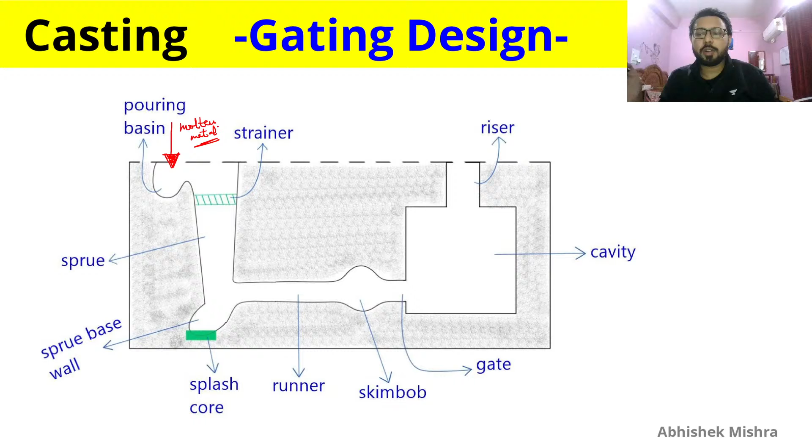The runner is a horizontal passage, not vertical, for the metal to pass through. The skimbob is the section where both light and heavy impurities get removed from the molten metal, so it can pass through the in-gate and enter the primary cavity. The riser, as discussed before, is there to compensate the shrinkages, specifically liquid and solidification shrinkage, that is till phase change. All shrinkages will be compensated by the riser, and after this, by solid shrinkage allowance.

So for the pouring basin, here are the standards: 2.5D, 25R, D, where D is the topmost sprue diameter. A good design of pouring basin is one which reduces the velocity of liquid metal in the sprue to minimize erosion. The main job of the pouring basin is to make the liquid metal enter the sprue such that erosion is minimized. These standards are obtained via experimentation. D is the diameter of the topmost part of the sprue, the height of the pouring basin is 2.5D, and the small curvature is 25R in radius.

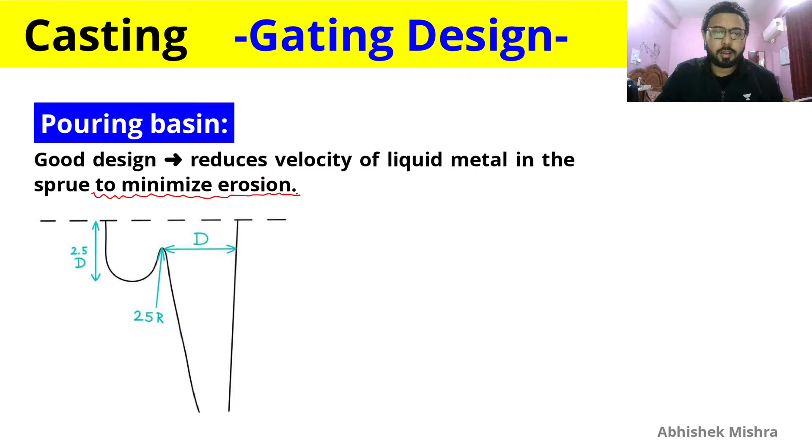Now we will move forward. I hope you can understand this, and you can write 2.5D, 25R and D. For pouring basin, you should write that its purpose is to minimize erosion - this will be enough, along with drawing this figure. That will be enough for your revision.

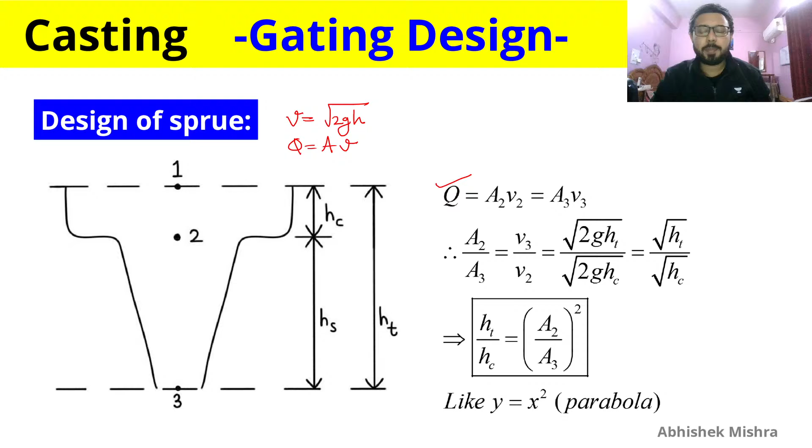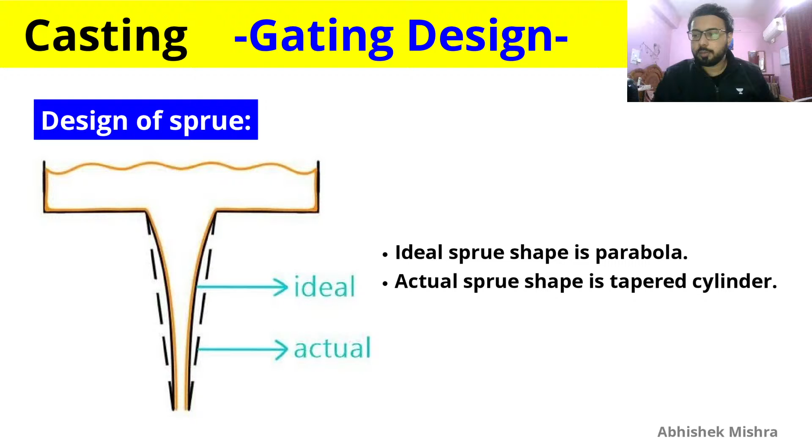So we have this ideal sprue shape, which is a parabola, shown here as a parabolic curve, and the actual shape is a tapered cylinder. Why actual instead of ideal? Because, as I said, manufacturing difficulty leads to using the tapered form instead. That should be clear now.

What is air aspiration? It is the sucking of air into the low pressure area, and that air gets absorbed into the molten metal, which then leads to a porous casting, which is obviously not desired.

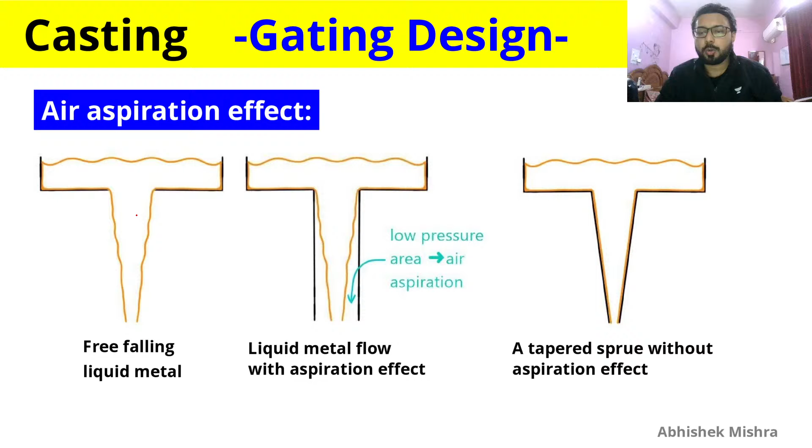So liquid metal flow with the air aspiration effect occurs when the sprue is straight instead of tapered or parabolic. If you provide a tapered sprue, you will not get the air aspiration effect.

Air aspiration effect: the entering of gases, from the baking of organic compounds present in the mold, into the liquid metal stream. These generated gases get entered into the liquid metal stream, making the casting porous and hence weak.

As I mentioned, pressure anywhere in the liquid stream should not be negative, because a negative pressure creates a low pressure area that sucks in air, leading to absorption or mixing of air with the liquid metal stream, which is not desired. So again, remember the ideal shape and actual shape, which help avoid air aspiration.

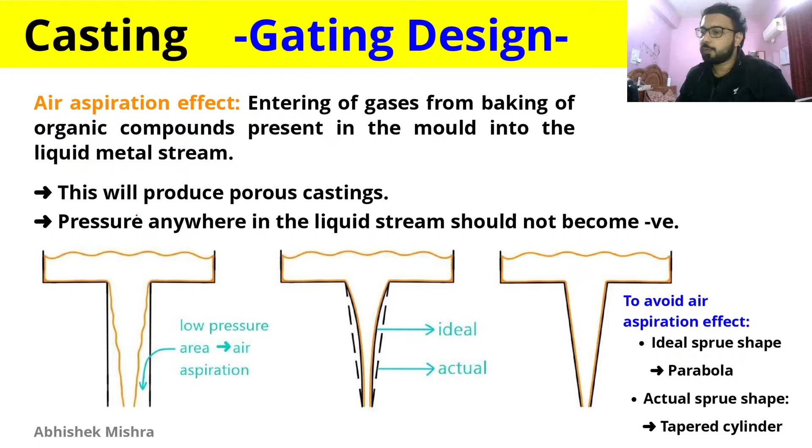Now let's talk about the runner quickly. To minimize turbulent losses, even though it gives more surface area, the section usually taken is a tapered cross section. So a tapered cross section runner is mainly used for minimizing turbulent losses.

But since it has more surface area, and more surface area means more heat transfer, because more area is in contact with the liquid metal to lose heat, there will be a lot of heat losses in this tapered, or trapezoidal, cross section runner.

But for a circular or cylindrical cross section runner, we can minimize heat losses because it has less surface area, though turbulent losses will be present. So you have to choose the runner cross section according to your requirement: if you need less turbulent losses, go with trapezoidal, and if you need less heat transfer losses, go with a circular or cylindrical cross section.

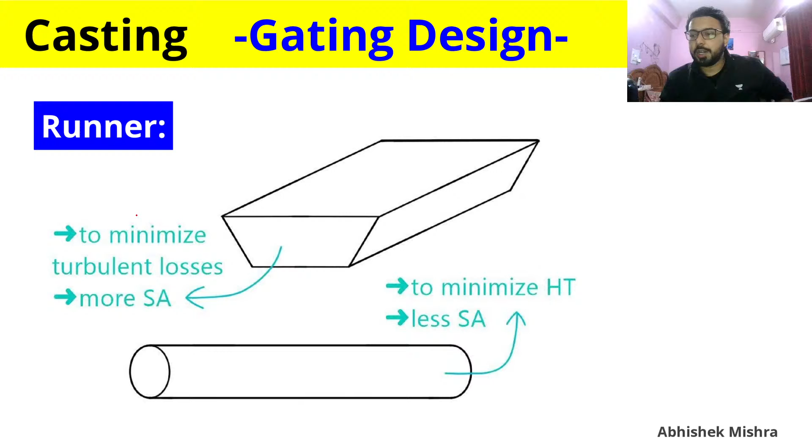Gate or in-gate is the final cross section or final section after which your molten metal enters the mold cavity, the primary cavity. So the actual entry point through which the liquid metal enters the mold cavity is the gate or in-gate. If a question asks what is the actual entry point after which molten metal enters the cavity, the answer should be in-gate or gate.

Both terms are the same. Gating design can be classified into two or three types: top, bottom, or parting line gating design. Let's study about them now.

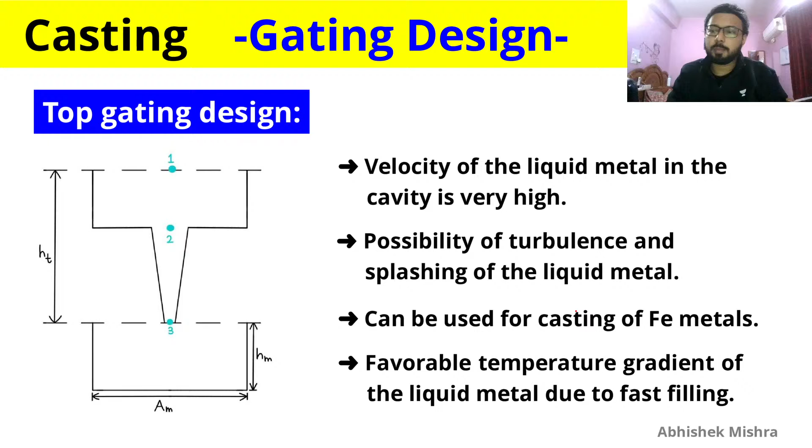So top gating system can be used for ferrous metal, even though it is having turbulence and splashing, because of favorable temperature gradient of the metal due to fast filling. The velocity will be very high and the temperature gradient will be in a favorable direction due to this fast filling. So these are some benefits, and just remember this formula of filling time. You should note this down, because we will be doing a lot of questions in which this formula is coming, and in a lot of GATE examinations also.

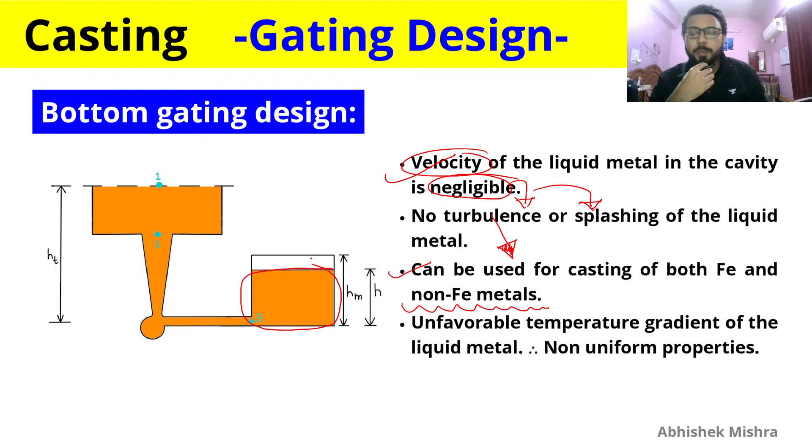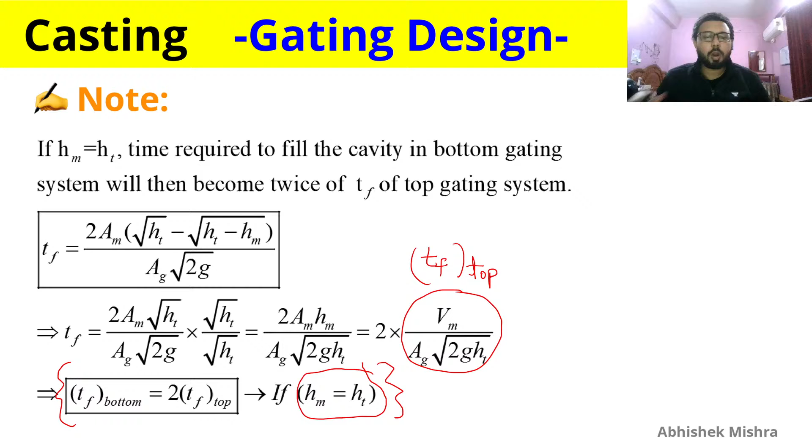So in this whole slide, you only have to remember this bottom part. Don't remember the whole process of how this is happening. Just remember this bottom part, that TF bottom is equal to 2 times TF top if HM is equal to HT. And again, this formula is very important here too.

Don't forget to just write the 2 here, because in the question it is possible that you can forget this. And again, the formula is quite simple. HT is coming first in both the times, and HM is here in minus, and both are under roots. And here there is no HT. Also remember this, because in the filling time of top gating system we found that there is HT here, but in the bottom gating system there is only 2 under root 2G. So remember these little things, and let's move forward.

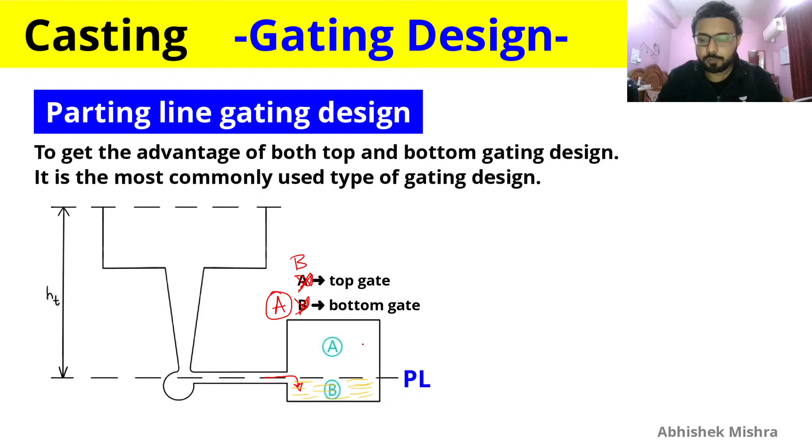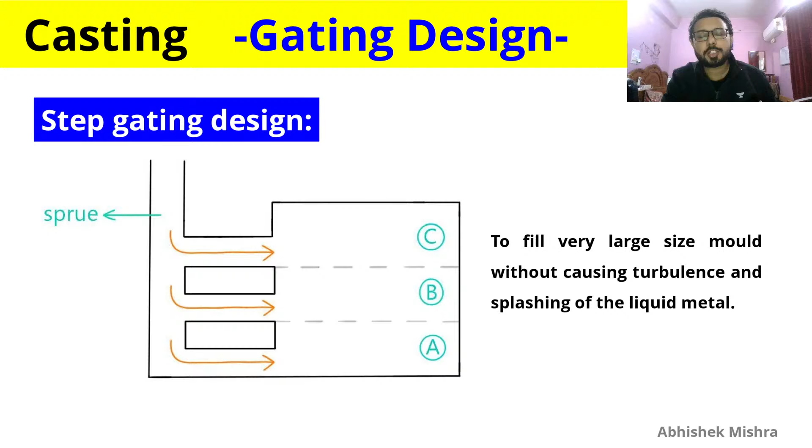Here the gate is divided into steps, and the molten metal enters by passing through these individual passages. You can just remember that this is done to avoid the turbulence and splashing. That's it.

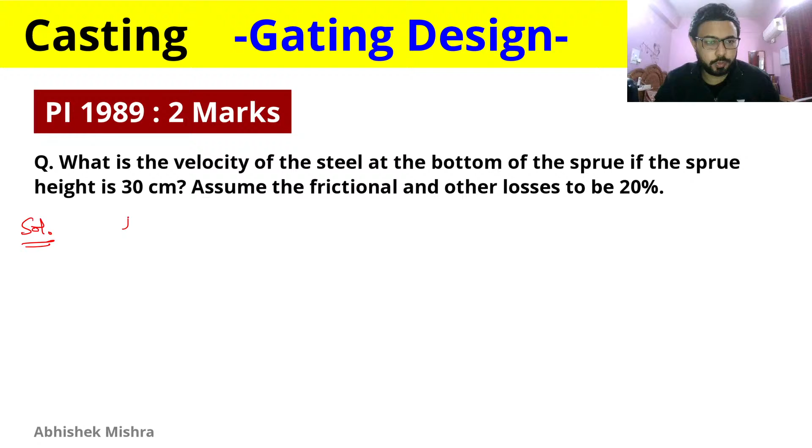What is the velocity of the steel at the bottom of the sprue if the sprue height is 30 centimeters, and we have to assume the frictional and other losses to be 20%? This question is quite interesting because we have frictional losses to account for, 20%.

There is one thing here which might confuse you in your GATE examination, so it's better you understand this very clearly. The velocity at the bottom of the sprue will be, first of all, you can simply give this answer by under root 2gh, and the height of sprue here is given as 30 centimeters, so HS is 30 centimeters. But here some losses are occurring, which will obviously make this velocity less.

So what you have to do is find out: will you find the answer by doing this, or will you get the correct answer by doing this? So what is the correct approach to this question? Benny, if you are watching this session live, can you tell me what is the correct approach to this question, the first one or the second one?

The 0.8, which is the factor that accounts for 20% losses due to friction, should we multiply 0.8 outside the under root 2gh, or inside the under root 2gh? I will answer this question in 15 to 20 seconds. This doubt can arise about where this 0.8 should be to get the final answer.

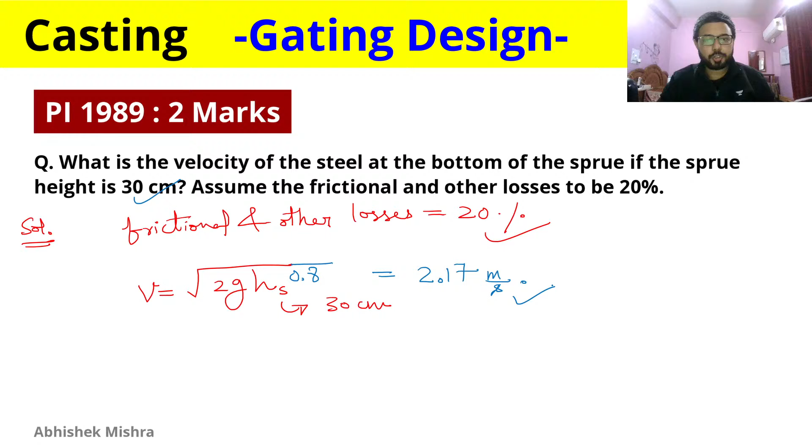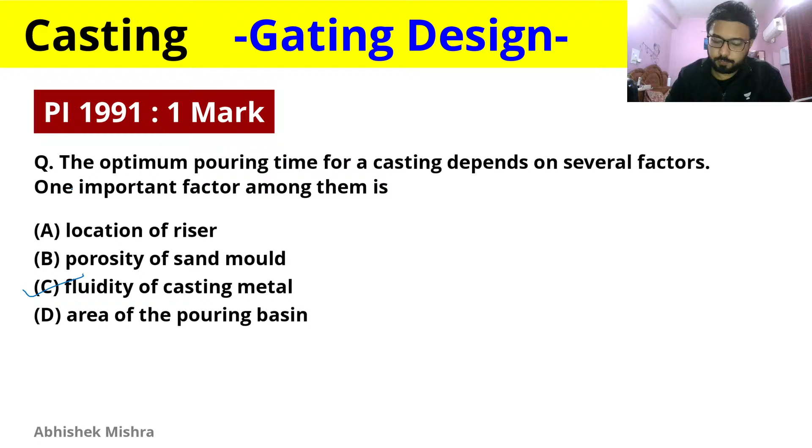So we have another question here. I will not be doing this question fully. I will just be telling you the steps and the concept that we can learn from this question, because this is again a revision class.

So we are just doing a quick revision. The whole session will be focused on you learning the concepts, tips and tricks, and the important things that should be taken care of. And here is the first thing you should remember, which can come in handy in other subjects too.

Acceleration due to gravity is sometimes given as 10. If it is given as 10, always try to take it as 10, because otherwise you will get the wrong answer. More specifically, for fill-in-the-blank answers, you should totally take this value as 10. So always check if the data given is what you're actually using. And if it is not given as 10, then always take 9.81.

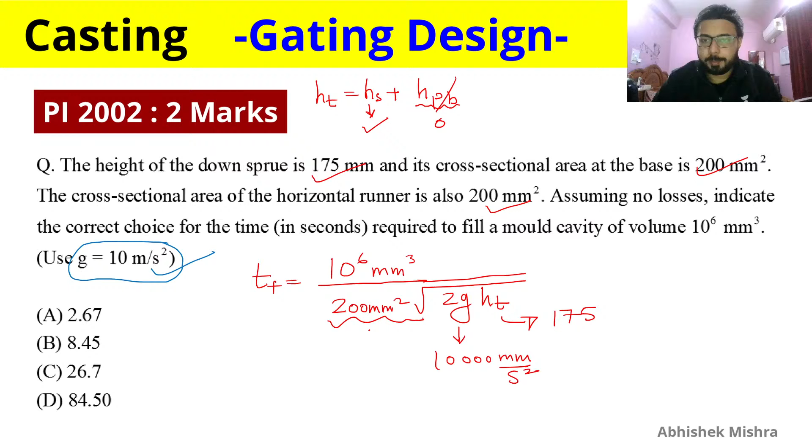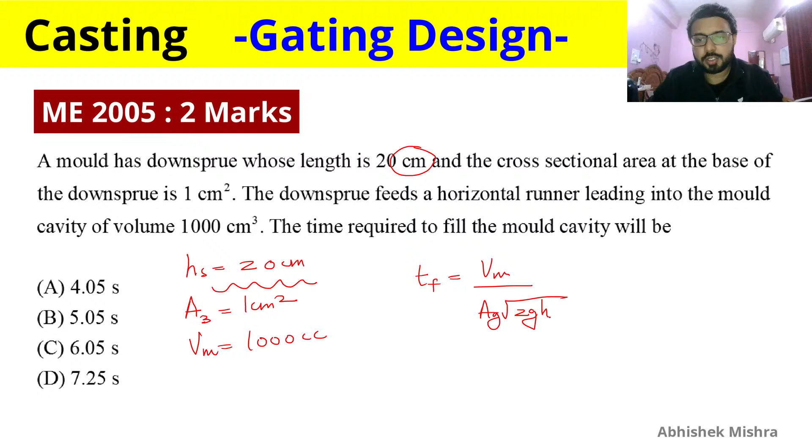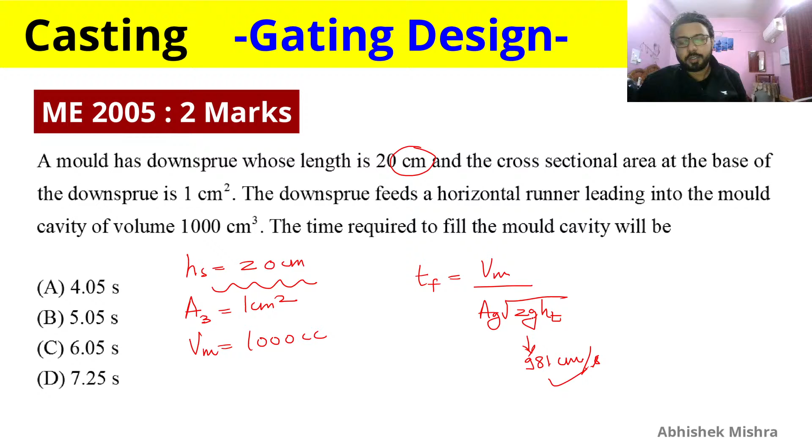Down sprue feeds a horizontal runner leading into mold cavity of volume. So volume of mold cavity is given. Time required to fill is given, which will be calculated using Vm by Ag times under root 2GHT. Since HT cannot be calculated, we will just continue by putting HS there, and here also we can find the correct answer. But remember, if you are putting everything in centimeter, put this G also in centimeter, which will be this. So instead of converting the whole thing, convert the G only and keep the whole calculation in centimeters itself.

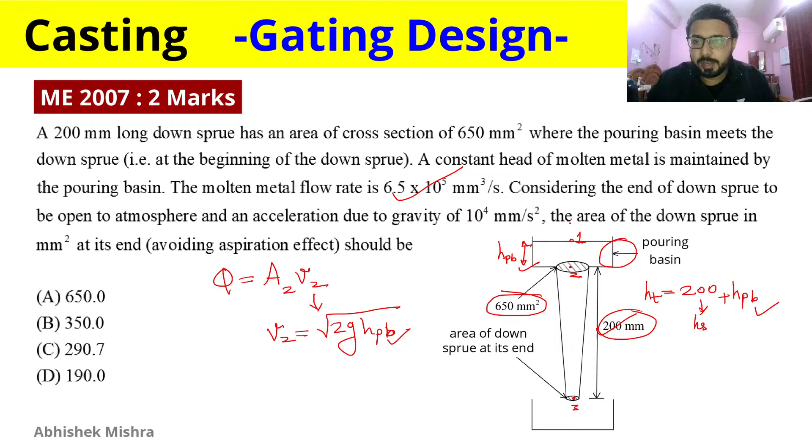And let's see if we have this Q or not. This Q is here in mm cube per second, so we can totally calculate all these things. After we have calculated all these things, what we have to calculate in the question is the area of the down sprue. So after we have calculated HT, we can find V3 by using this formula, and then we can use this volumetric flow rate equation. We have this V3, we have this Q, then we can find the answer, that is A3, which will be our answer.

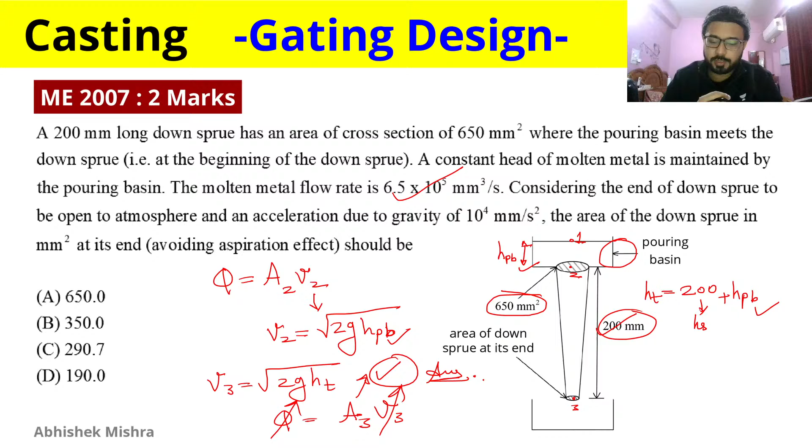So this whole thing can be done in this manner. The steps are to be followed, and I hope this is clear. Now we should be moving forward. But here don't just take the pouring basin, don't ignore the pouring basin height and take only the sprue height. If you do that, you will not get the correct answer. So while calculating area at 3, take the height above it. Above it you will be getting the height of sprue and height of pouring basin both. That will give you the total height there.

So this was the figure in which I solved the question when I just completed this in my regular class. But since this is revision, we discussed it here only.

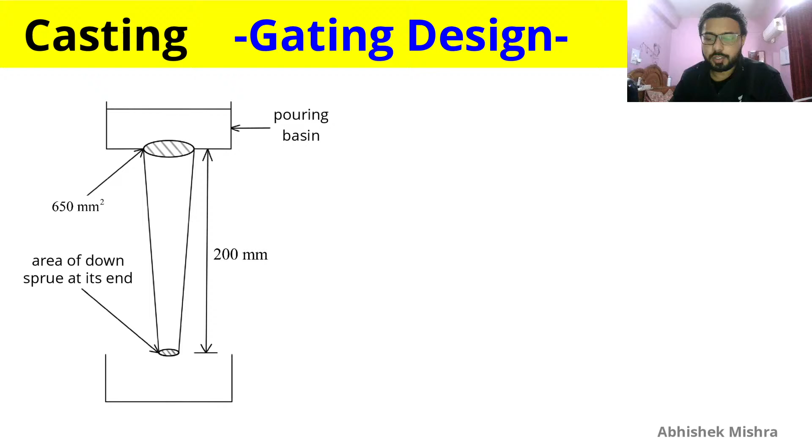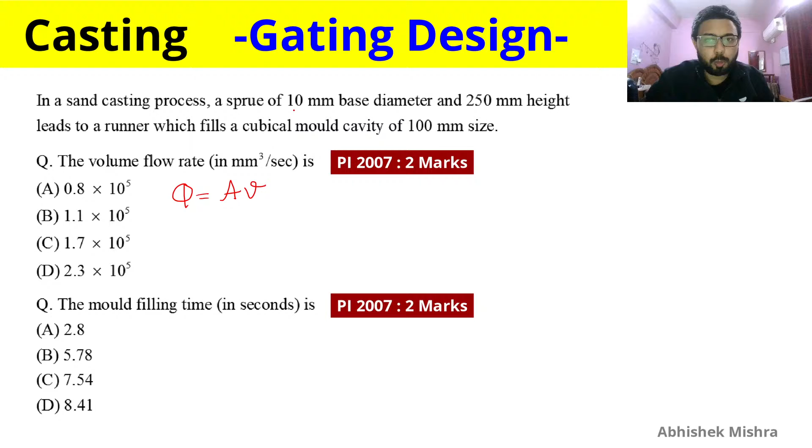So we have a next question which is asking us for volumetric flow rate, that is Q. And here to calculate Q we need an area and we need a velocity. Let's see, we have this sprue base diameter and height. So sprue base diameter will provide us this area. Base is the bottom part, so bottom part we will have this height 250 of sprue.

And we have the cubical mold cavity, so that volume can also be calculated. So what we can do here, we can find the velocity by using this formula under root 2g ht, since there is no option of calculating pouring basin height. So we will go with the sprue height only to calculate this velocity at the base of the sprue. So final volume flow rate can be obtained like that.

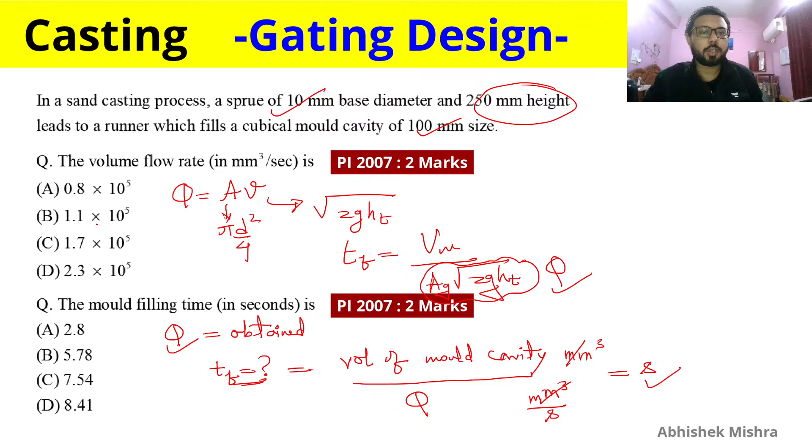So this is another way of doing calculation of filling time. You can also do the calculation by using this formula of filling time, that is TF is equal to VM divided by AG under root 2G HT, and you will find that this bottom part is nothing but Q. So since you have obtained the volumetric flow rate itself here, I think it should be 1.7, I don't remember the exact answer, but if you have obtained a final value of Q, then you should totally use that and just avoid this calculation here.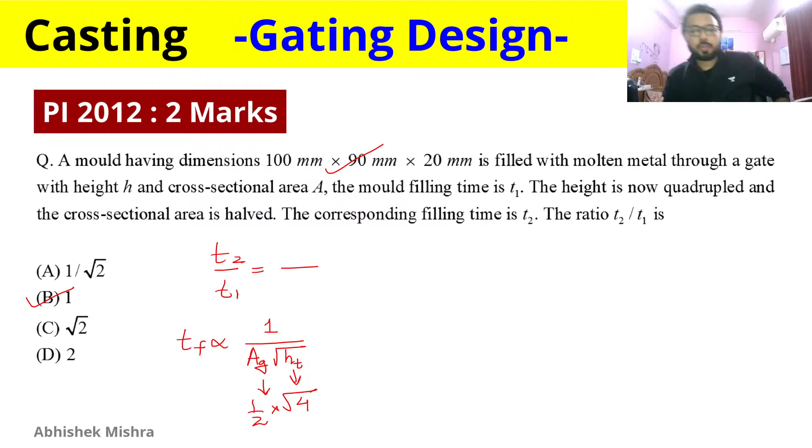And here is one more question which is taking into account the parting line gate. So that gate system will be like this, where you can see that our mold cavity is divided into 2 parts, A and B. So this A part will be treated as the bottom gate system, and this B part will be treated as the top gate system.

So what will happen, you need to just calculate the filling time, or the filling time is given as 10 seconds. So you need to calculate the AG by putting the equations of filling time of this top and bottom gate respectively. By doing this you can obtain the area of gate and the filling time of bottom gate and top gate. I have already shown you the formulas for what they are.

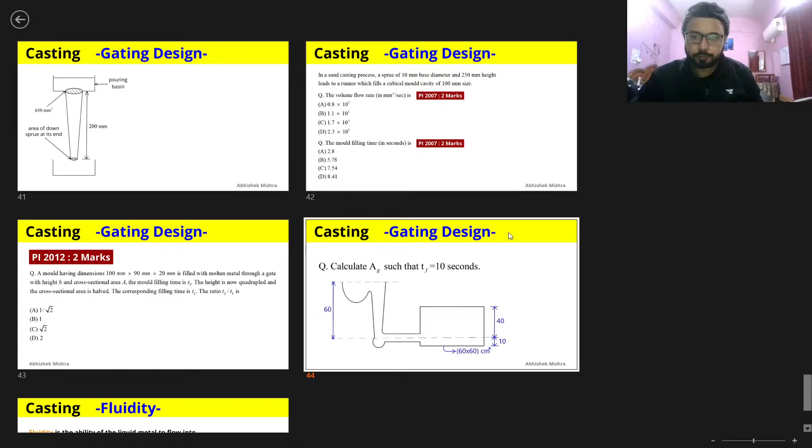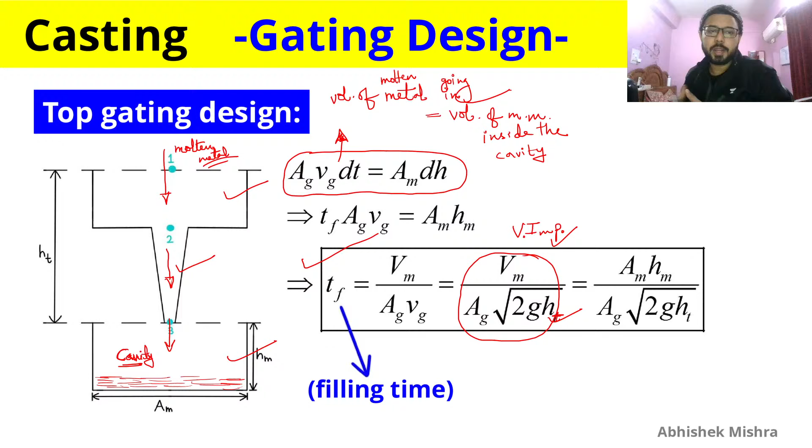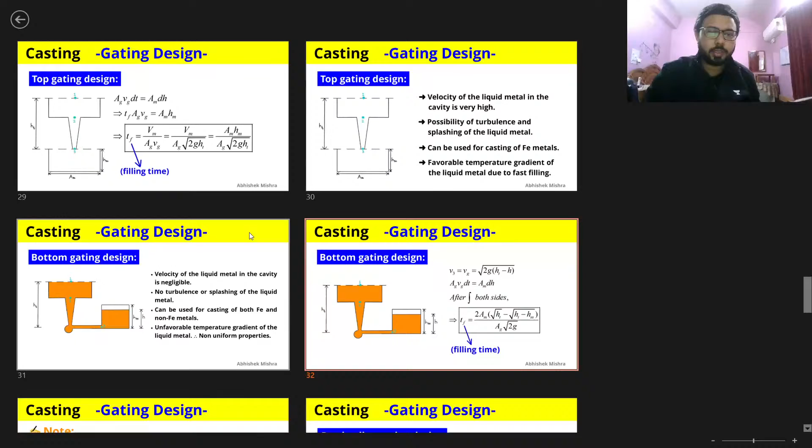Let me show you that again. So for the top gate we had this filling time formula, you can use that, and there the volume of mold will be changed. Only that volume which is having the top gating filling done by the top gating design will be there in this formula, and for bottom gating we will take that volume only where the bottom gating design is being followed. So that will be the process of doing the question here, and you can obtain that answer properly.

So let's move forward. I don't think this can be asked, but if the calculation is easy then it could be asked in the GATE examination. But this question is quite lengthy because you have to do calculation two times using these two formulas. So this is a bit lengthy here, but the concept is very good. The concept is that the two parts are here, and the two parts are following different types of gating design, that is bottom and top.

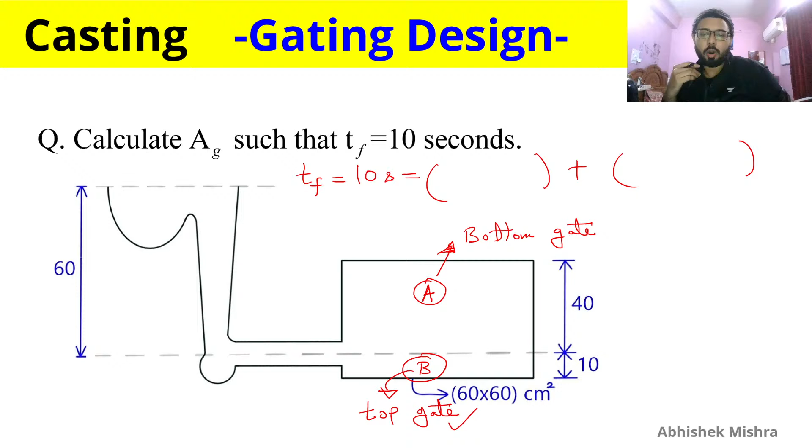Then we have this fluidity. So what is fluidity? Fluidity is the ability of the liquid metal to flow into the cavity. So we have two properties in casting which start with F, and students might get confused here. We have fluidity, which is a property of liquid metal. Then we have flowability, which is a property of molding sand.

So don't get confused between these two properties starting with F. Flowability is the ability of the molding sand to fill the mold box properly so that it can create the mold cavity properly, and fluidity is the property of liquid metal, so it can fill the mold cavity properly to make the casting. So we are doing the spiral test to determine fluidity.

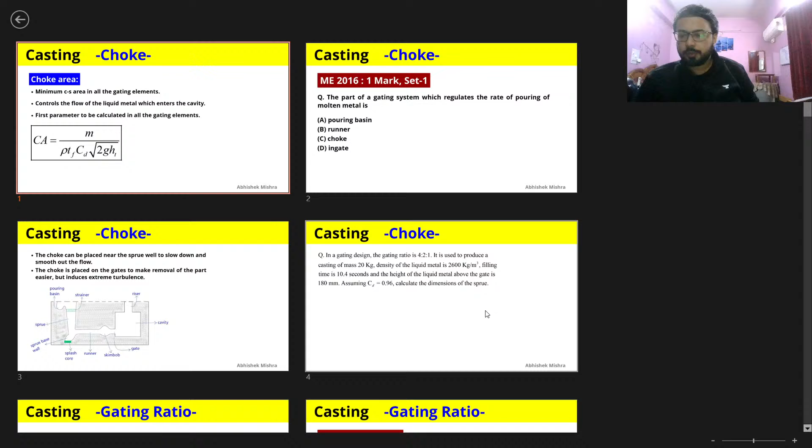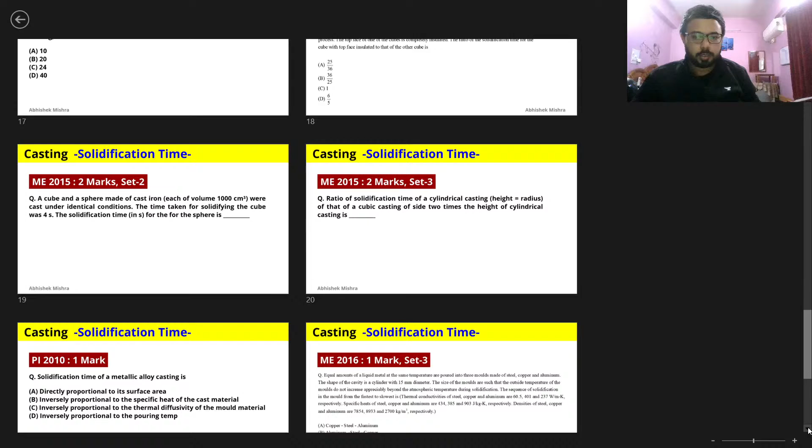We will do one more part of the discussion after taking a break. Before the break, we will have a nice discussion, I think it will take around half an hour or less. We will cover a lot of things here, solidification time is also one of the topics to be covered now, so let's do that.

Choke area controls the flow of liquid metal which enters the cavity, so you should remember this. A GATE question can come: which area controls or regulates the flow of liquid metal entering the cavity? It should be choke area. It's the first parameter to be calculated among all gating elements, because it controls the flow of liquid metal entering the cavity. Here is the formula for choke area that you should remember.

Mass is in kg - I'm telling you a very important trick to remember this formula. Always remember the units here, so that if you miss one of the parameters, you can remind yourself by finding out what unit is missing. Mass is in kg, this is in kg per meter cube, and this will be in seconds. This will be unitless because it's a correction factor, and this will be in meter per second. So your final unit comes out as meter square, the unit of area. If you're missing TF, you can find out that seconds is the unit to be put there, so you remember that the filling time was what you were missing.

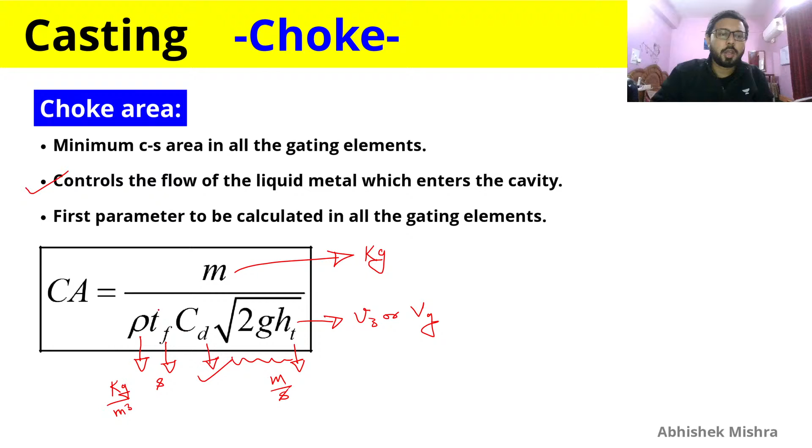So just remember this formula by taking into account the units used, how the formula is written. It is mass divided by density into meter cube into second into correction factor into meter per second, which is the velocity of gate, V3 or VG. So this is correction factor, filling time, and this is density. This whole equation will give you choke area, which is the minimum cross-sectional area in all of the gating elements.

Now we have this question: the part of the gating system which regulates the pouring of molten metal is choke.

The choke can be placed near the sprue well to slow down and smooth out the flow, or choke can be placed on the gate to make removal of the part easier, but this induces extreme turbulence. So there are two ways we can place the choke: near the sprue well, or on the gate, and they both have the limitations and advantages shown on the screen.

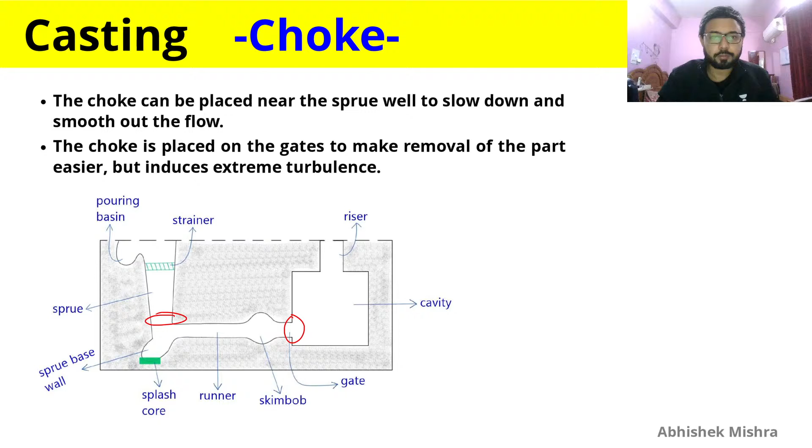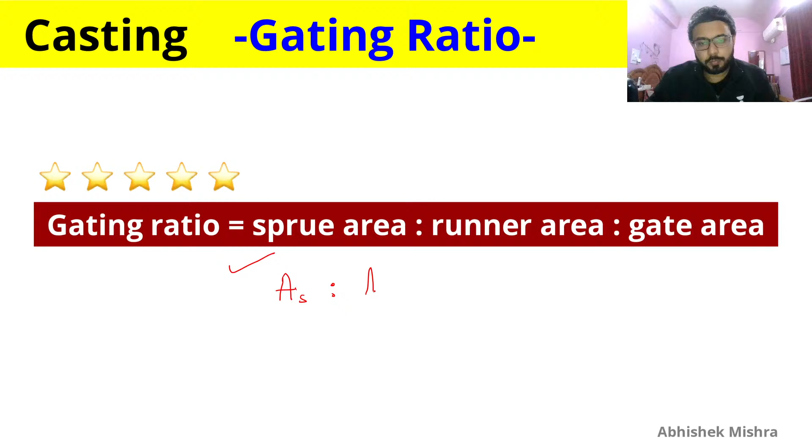In gating design, the gating ratio is 4 is to 2 is to 1. So what is gating ratio? Gating ratio is sprue area is to runner area is to gate area. It is always in this order: first sprue area, then runner area, then gate area. So this is the gating ratio.

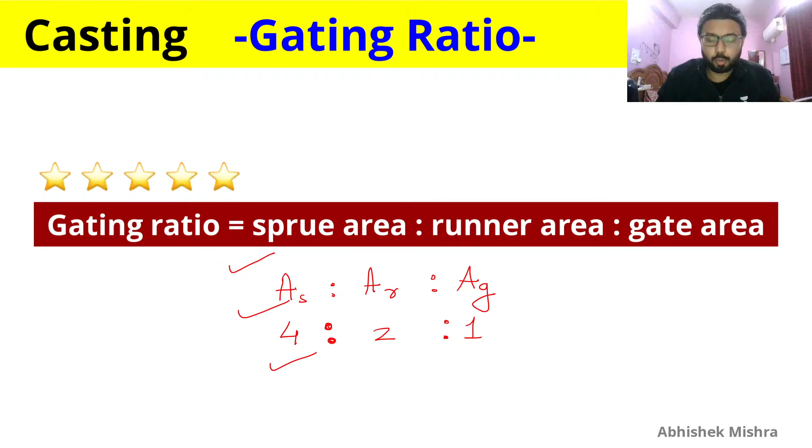And in gating design, the gating ratio is 4 is to 2 is to 1. So your sprue area will be having the largest size. From this gating ratio we can deduce that, and runner area, then we will get the gate area to be the smallest one. So the smallest area is gate, so you can also deduce that it will be the choke area. So what is given here, gating ratio is 4 is to 2 is to 1, which again I am writing in this order.

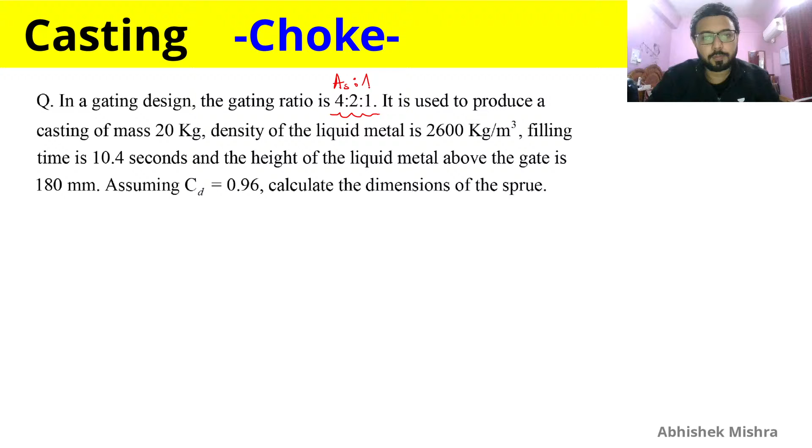It is used to produce casting of 20 kg mass, liquid metal density given, time given, height of the liquid metal above the gate given, HT given, and CD this correction factor is given. So we have to calculate the sprue dimensions, that is sprue diameter, and to do that we need to calculate choke area, because choke area is equal to gate area since it is the smallest, as 4 is to 2 is to 1 is the gating ratio. So area of gate will be the smallest one.

So if we can find choke area, we will find area of gate, and area of sprue is 4 times the area of gate. So we can find the area of sprue equal to this term, and from here we can find the diameter of the sprue. That will give us the answer in mm. This is the whole process you can do to find the answer here.

Again, not that hard, but you have to remember the choke area formula to calculate that, and also you have to remember this gating ratio order, because you need to know which area is the choke area, and that is the gate area here. Again, this is the gating ratio.

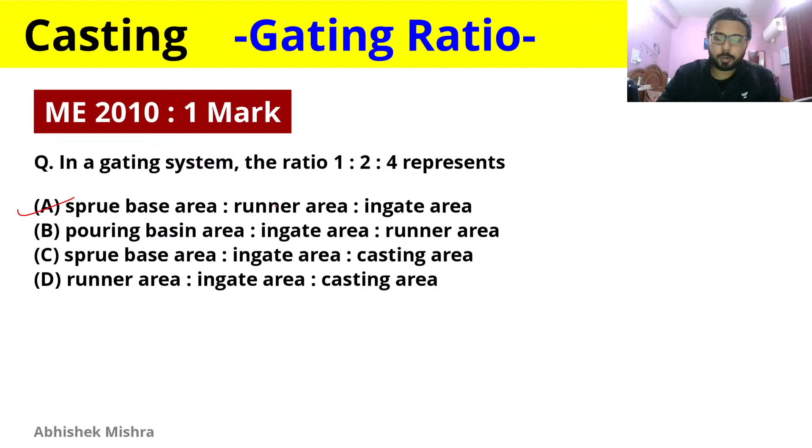In the gating system, the ratio is 1 is to 2 is to 4. What is it representing? It is always representing sprue area is to runner area is to in-gate area. The rest of the options are not having this correct order, so the correct answer is A.

Unpressurized gating system and pressurized gating system are the two gating systems that we have to study for the gate, which involves placing the choke area into different places or locations.

First, choke area is if it is at the base of sprue, that is the bottom part of the sprue as shown in the figure, then the velocity of the liquid metal entering into the cavity will be less, with no turbulence and splashing because of less velocity. After it passes the choke area, the molten metal will flow through the runner and the losses will be obtained there. Since there is no turbulence and splashing, as I have discussed again and again, you can use it for non-ferrous metal because of no oxide formation, since oxides of these non-ferrous metals are not worth having because of their brittle and hard nature.

There is a possibility of air aspiration, and casting yield will be less. Air aspiration occurs here, that's why the red tick, and casting yield is less, that's why the red down sign. Casting yield less we don't require, and possibility of air aspiration is because of the choke area at the bottom, due to negative regions occurring in the sprue, where low pressure negative regions lead to mixing or sucking of air aspiration there. The gases generated mix with the liquid stream, and there will be porosity in the final casting, which is not desired.

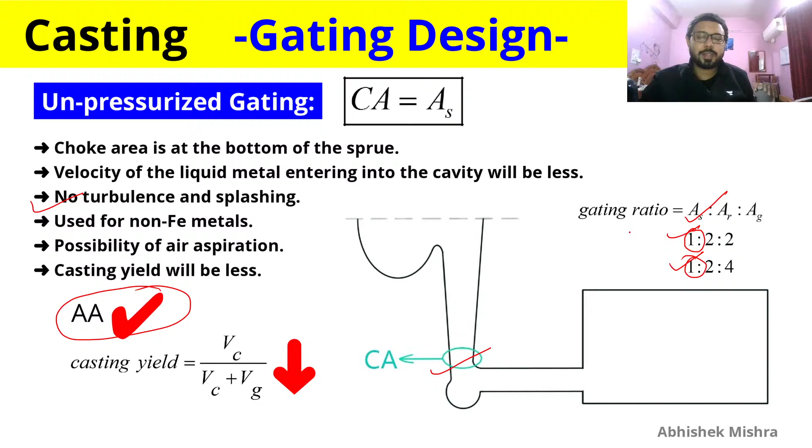So gating ratio is always this. If the gating ratio is 1 is to 2 is to 2, then area of sprue is less, so you will say this is an unpressurized gating system. If it is this also, then you will say this is unpressurized gating system, as area of sprue is less, and it is therefore the choke area.

So we have a pressurized gating system now. What is a pressurized gating system? It is simply where the choke area is at the gate region, so choke area is at the gate or in-gate. Velocity of the liquid metal entering the cavity will be high, and turbulence and splashing will occur due to high velocity. Therefore it is good for ferrous casting, not good for non-ferrous casting, so we will avoid using pressurized gating system there. It is also not good for light alloys, remember that. And there is no air aspiration due to back pressure.

There is back pressure here due to us putting the least area at the gate. This will lead to no air aspiration effect, which is very important. You just have to remember this line, that back pressure leads to no air aspiration effect. Casting yield will be more, so that is a positive point, that there will be no air aspiration effect and casting yield is more. So we find this one better than the unpressurized gating system.

Due to back pressure, you can just relate and say it is called a pressurized gating system. And if the gating ratio is 1:2:1, then also we will take it as pressurized gating system, because here AG and AS both are least and both are equal, but we still take this as pressurized because the area of gate is the smallest, which leads to these advantages. So if the gating ratio is simply 2:2:1, it will also be pressurized. Remember this.

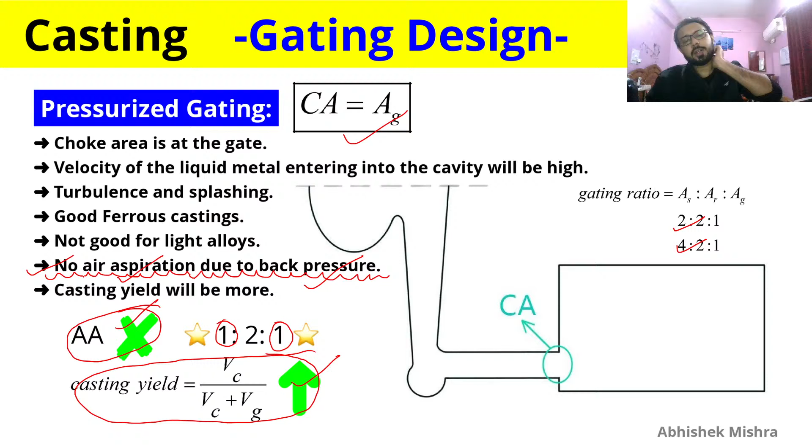Solidification time calculation. We follow Chvorinov's principle to calculate solidification time, that is the time taken for the molten metal which has filled the cavity to become solid. That time will depend upon the ratio V by A square. This square is very important, don't miss it.

If we remove the proportionality sign, we get K, the solidification factor, having units of seconds per meter square, though it can also be written in other units, but basically the top term is time and the bottom term is length square. V represents the amount of heat available and A represents the heat transfer. If V is greater, solidification time is greater, and for that V, if area is less, solidification time will be greater, and if area is more, solidification time will be less, because more heat transfer takes place and therefore it solidifies sooner.

So TS, solidification time, is also inversely proportional to thermal conductivity, because higher thermal conductivity leads to quicker solidification, therefore time will be less. Specific heat is also inversely proportional, because more change in temperature occurs for less amount of heat.

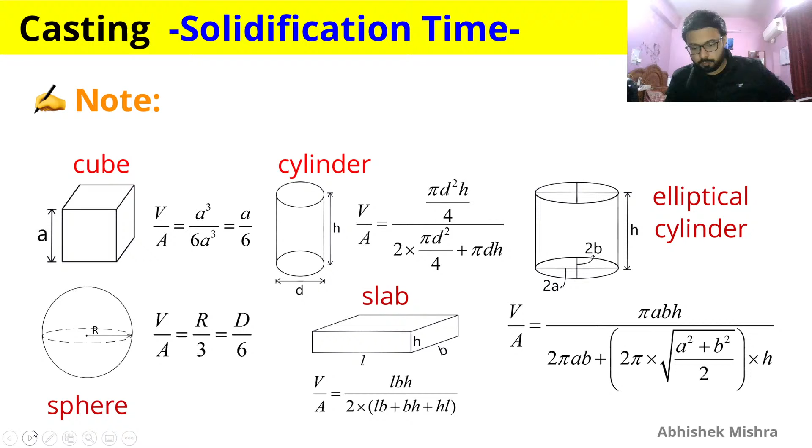Solidification time is important in casting because it affects...

So here are some notes that you have to just remember, and these notes are sharing some important information that might get asked as a GATE theoretical question about solidification time, or it can just improve your concept.

Why are we studying solidification time? Because it is important - it affects production rate and hence process economics. The resulting microstructure, and hence properties, are also affected by this solidification time.

Chvorinov's principle has this formula where K is the solidification factor, and it depends upon metal and mold material both, and it depends upon their density, heat capacity, and thermal conductivity, not cavity.

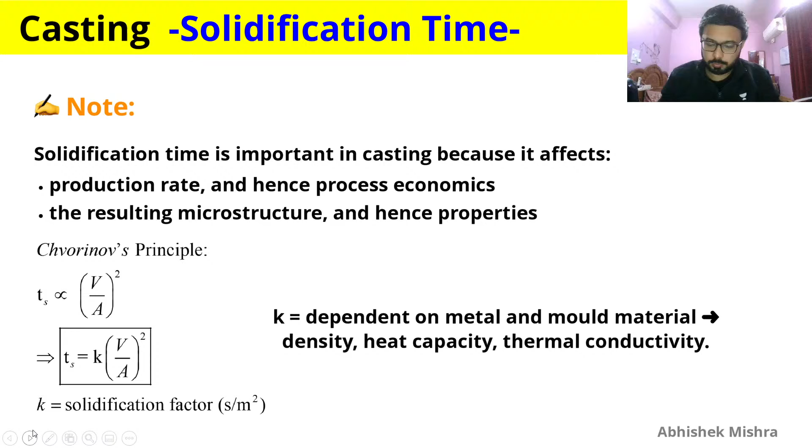We have this question where we are given two cubical castings of the same material. Sizes of 2 centimeter and 4 centimeter are molded in green sand, so moisture one. If the smaller casting solidifies in 2 minutes, then you have to find the solidification time of the large casting. You can simply solve this by writing T1 divided by T2 equals V by A of 1 square over V by A of 2 square, and get the answer from there.

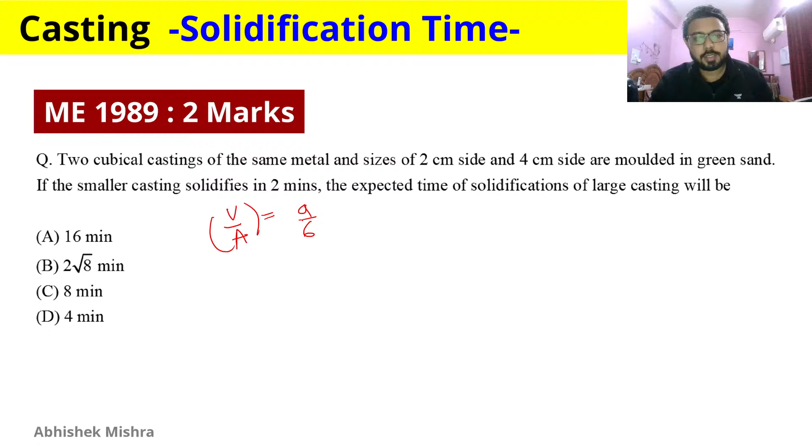With a solidification factor given, if you have properly understood this, you can do it very quickly, since the cubical casting has V by A ratio as A by 6. So if the side is changing by 2, its square will become 4, and the final casting will solidify in 2 times 4, which is 8.

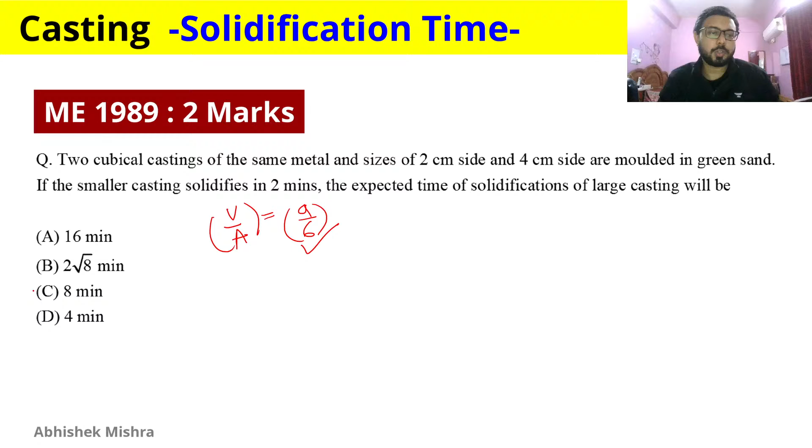With a solidification factor of 0.97 into 10 to the power 6 seconds per meter square, the solidification time of a spherical casting of diameter 200 mm is asked. Again, very easily we can calculate this - write 0.97 into 10 to the power 6, write the diameter in meters, and it will be D by 6 for spherical, so 0.2 by 6 square. After doing this, you will find the final answer, since it doesn't have that much calculation, we can totally do that here.

So it is coming out as a B.

These questions are done very properly, very easily, without involving a lot of calculation or wasting a lot of time. This is again a 2 marks question, but it is very easy. I expect you to just understand the usage of all this formula properly. Just do questions, quite a few from each and every topic, so you can get a proper idea and solve these 2 marks questions easily, without taking much time, so you can get time for solving hard questions.

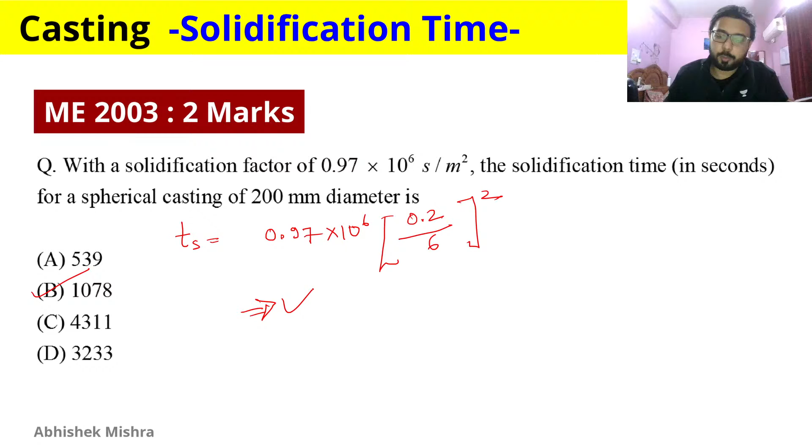In sand casting process, a sphere and a cylinder of equal volumes are separately cast from molten metal under identical conditions. The height and diameter of the cylinder are equal. We need the ratio of solidification time of the sphere to that of the cylinder. So we are provided with height and diameter of cylinder equal, and we have to find solidification time of sphere to solidification time of cylinder.

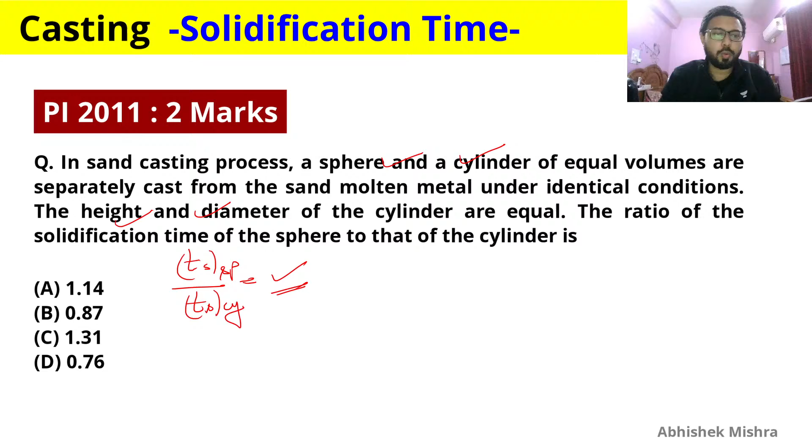A cube shaped casting solidifies in 5 minutes.

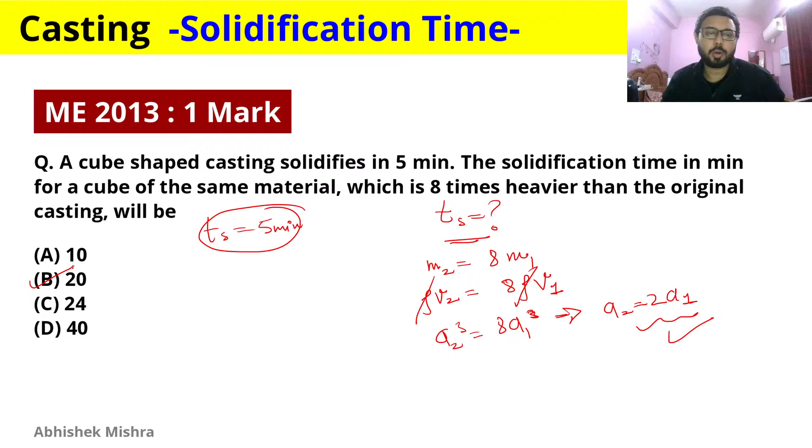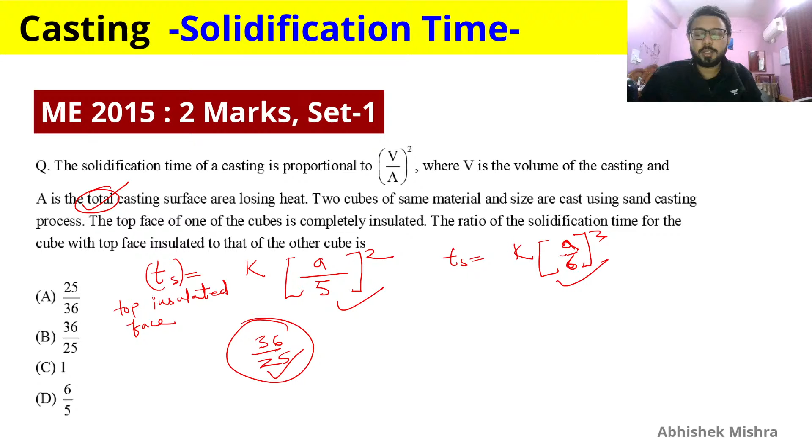So we have calculated this top face insulated value, and that value will be A by 6, which is having no face insulated. So if you put the ratio of this top face and bottom part with the normal one, you will find 36 by 25, which is the correct answer.

This type of question, if you do it once, then you can be very well prepared. I am expecting that you do all the previous year GATE question papers from casting at least once, so you can get a good grasp of this solidification time calculation questions.

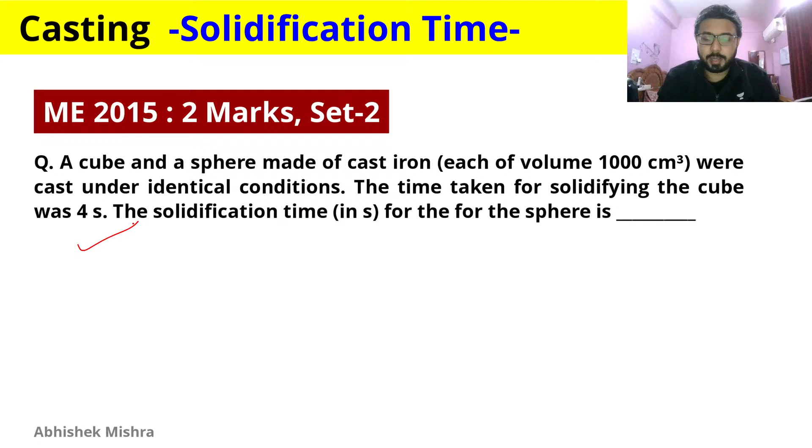As you can see, you are having a lot of questions. GATE has asked a lot of questions from this topic, so it is better to prepare this completely, fully and properly, so that you can do the question in the fastest possible time, and also without making errors.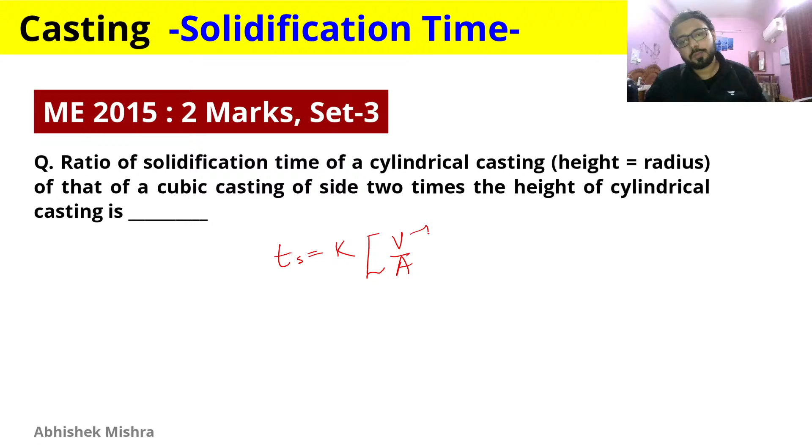The same formula you have to use, and you will be getting a similar answer, not the same answer. So just use this formula, think about the geometries properly, and solve this.

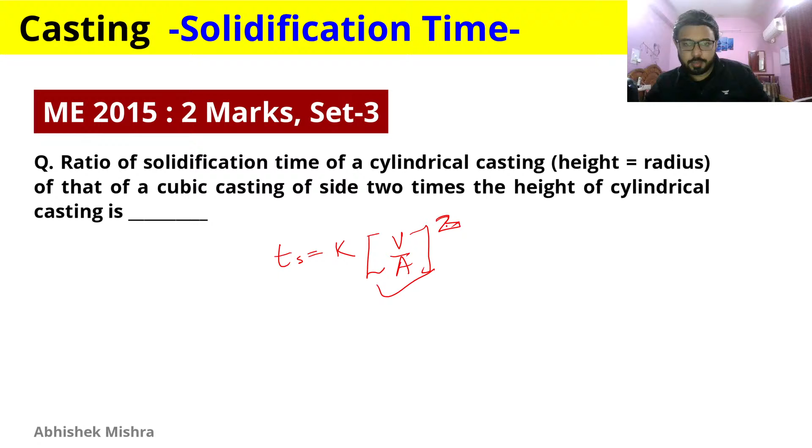You can do this question again, not that difficult, and I have done this in one of my classes, so I won't waste time here because we have to cover all the casting revision topics.

Solidification time of a metallic alloy casting is directly proportional to its surface area. No, it is inversely proportional to square of the surface area, inversely proportional to the specific heat of the cast material. It is also inversely proportional to the thermal diffusivity of the mold material, and directly proportional to the pouring temperature, but inversely proportional to thermal diffusivity of the mold material.

Thermal diffusivity is equal to K by rho Cp. So you can say it is only inversely proportional to thermal diffusivity of the mold material.

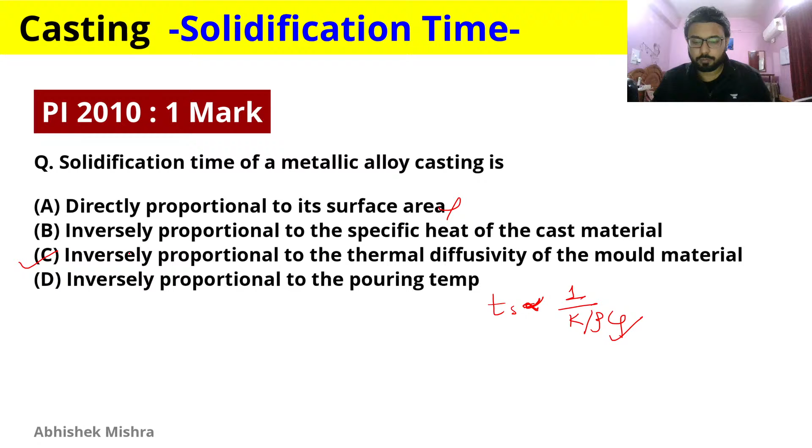I think I should correct this, it should be directly proportional, because if specific heat is greater, your solidification time will be greater, since it will require more heat to make the temperature change needed to solidify. So this will be directly proportional, as you can see from the thermal diffusivity formula also, K by rho Cp.

So we have 3 questions left for this slide.

Equal amounts of liquid metal at the same temperature are poured into 3 molds made up of steel, copper, and aluminium. The shape of the cavity is a cylinder with 15 mm diameter. Size of the molds are such that outside temperature of the molds do not increase appreciably beyond atmospheric temperature during solidification. We have to find the sequence of solidification in the mold from fastest to slowest.

We are provided with K, thermal conductivity, specific heat Cp, and the densities. So we can find the thermal diffusivity K by rho Cp, and we know solidification time is inversely proportional to this thermal diffusivity.

By doing this, we can get the answer of which material has the smallest solidification time and which is solidifying the slowest. Again, not a hard question, only 1 mark question, and the question is quite big, but it is just providing you the required information to solve it.

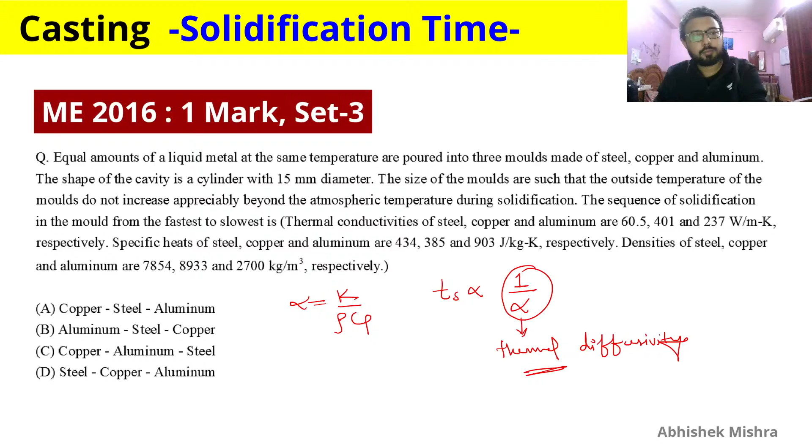And thermal diffusivity, let's talk about it. It is K by rho Cp. High diffusivity means high heat transfer, or you can say high diffusivity means heat transfer is rapid, and it measures the ability of a material to conduct heat energy relative to its ability to store thermal energy. So Cp can be seen as ability to store thermal energy, and K is shown as ability to just conduct the thermal energy. So K by rho Cp is just giving you the measure of ability of a material to conduct the thermal energy relative to its ability to store the thermal energy.

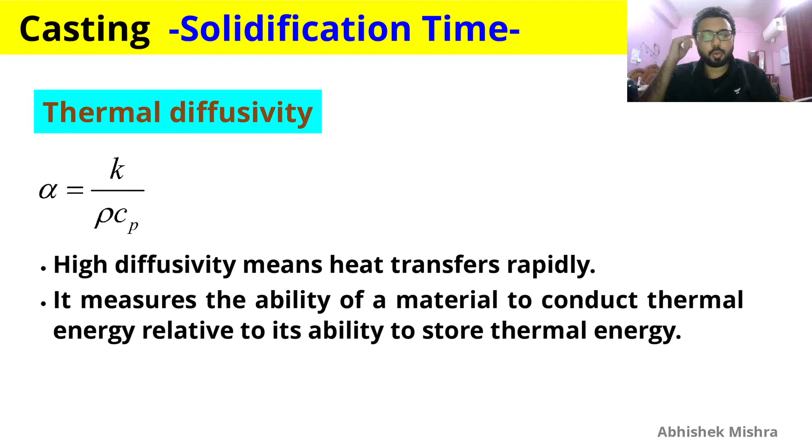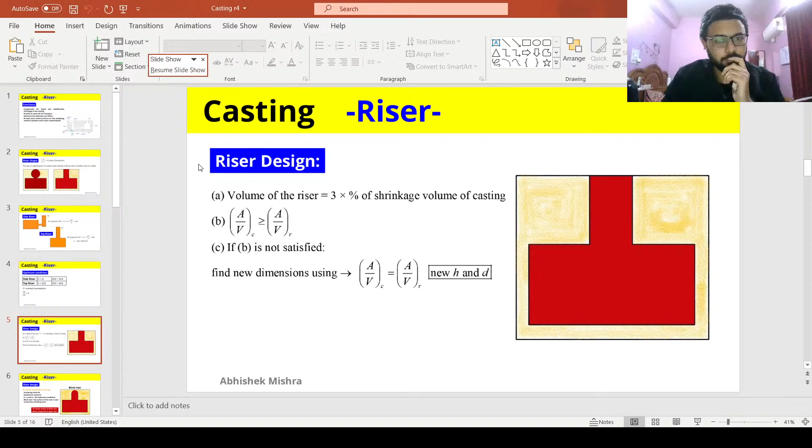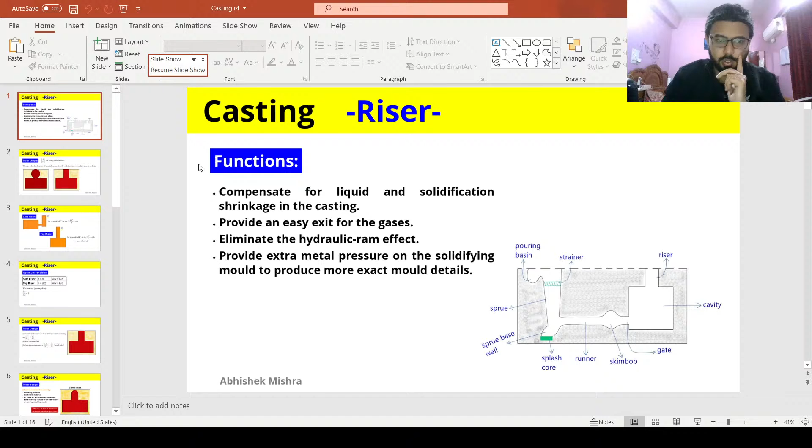Let's see what we have in the next part here, and if we should continue that or if we should just do that in the next class. So we have this riser. So let's do this into next class, since I don't think a lot of you watching live. So I will be making sure to continue this class next time. But now I think we have discussed a lot for today, and we should totally just end it here.